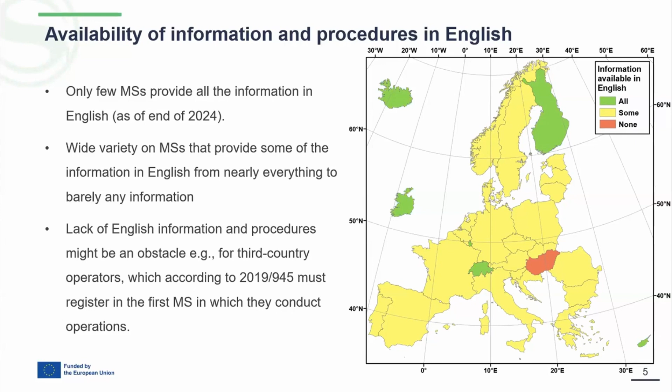And also migrant workers and third country operators might have issues if you need a local electronic ID to register to the website. And also EASA warns against fraudulent websites that offer non-official pilot licenses for a price. So I don't think it would be very surprising that people, when they cannot get the training materials openly available in the country they try to operate in, might look for additional websites and find some of these fraudulent websites.

So then the new rules set some rules regarding mandatory reporting of some incidents and occurrences. And roughly 2/3 of the member states provide information on the mandatory incident and occurrence reporting. But of these member states that provide the information, only roughly half give specific guidelines for UAS on which type of incidents or occurrences must be reported.

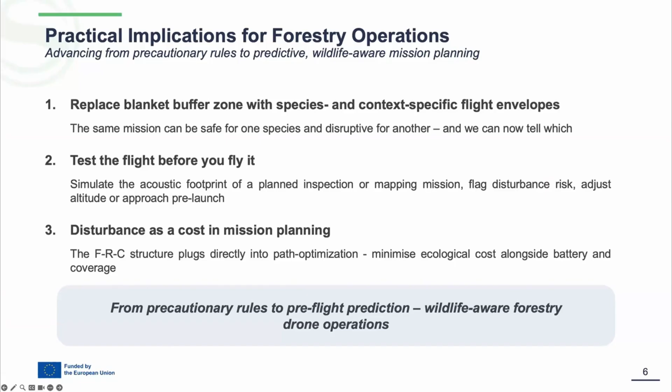So far, we have focused on environmental impacts. Now I will briefly move to the social dimension of drone technology adoption. The key question here is simple: who is actually using this technology? Because technology does not affect everyone equally, it often reflects existing inequalities.

To study this, we use multiple data sources. This includes surveys and project participation records, as well as interviews with experts and local communities. This helps us to understand the real challenges people face in practice. We also compare the results across different countries, including Spain, Norway, and Greece. So this allows us to identify patterns from different perspectives.

And the results show clear differences between sectors. In agriculture, there is a moderate gender balance. Women are often in leadership or advisory roles, while men dominate technical drone operations. In forestry, especially in Norway, the gender balance is low. Men dominate both operational and technical roles. In livestock, the imbalance is even stronger, with very low participation of women.

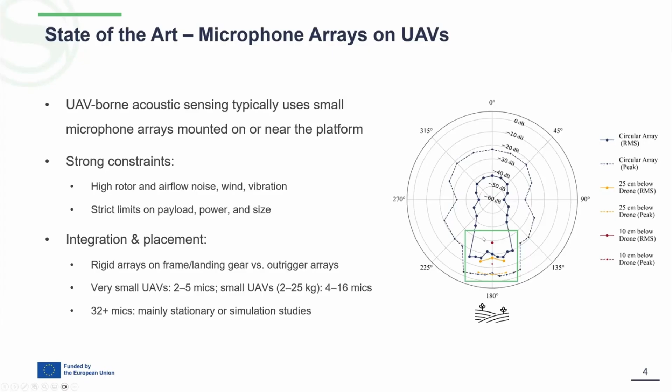And it also depends on the distance. The blue line is about 1 meter away, whereas the red dot here is, for example, 10 centimeters below the drone. So this was also our approach: we want to develop a framework which can be mounted directly on the drone so that we can use the drone itself as a kind of windshield.

And as I already mentioned, the noise introduced by the operation of the drone, no matter if it's the wind noise or the motor noises itself, are quite a challenge. So there are different ways how to deal with this kind of noise. On the one hand, there are the classical post-processing approaches, like, for example, spectral filtering or source separation. But lately, there are also developments regarding AI-based approaches, like data-driven denoising or even localization models.

The big benefit, of course, is that it shows potential for improved performance, but at the end, it's always this compromise between a robust and efficient versus a promising and expensive approach. So there are some key research gaps, especially for agriculture. Namely, most of the work we see in acoustic sensing is done so far for speech or gunshot sounds. So usually very loud and very distinct noises, but not for broadband agricultural sound scenarios where you have to cover from animals to heavy machines.

So that means we have a lack of domain-specific data sets, as I mentioned, livestock, insects, machinery, and this also leads to little evaluation under realistic ego noise of the drone itself and also low signal-to-noise ratio conditions, especially if you're talking about very silent noises like an insect, for example.

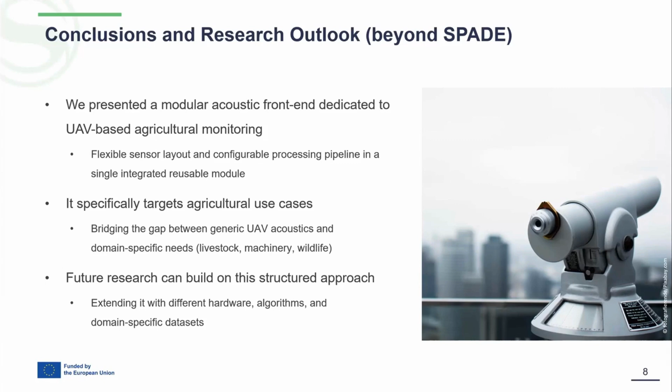But of course, there will be future research needed to even improve this approach. For example, extending to even more hardware configurations and maybe even more powerful approaches, which will need higher computational power, which we decided not to focus on, because, as I said, we really wanted to process everything on the drone itself, so that there is no transmission of the raw signals needed.

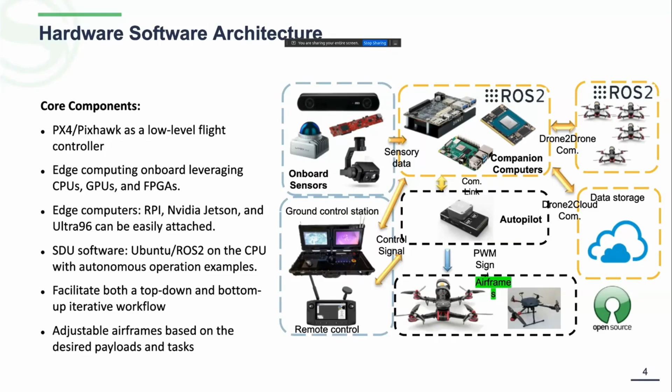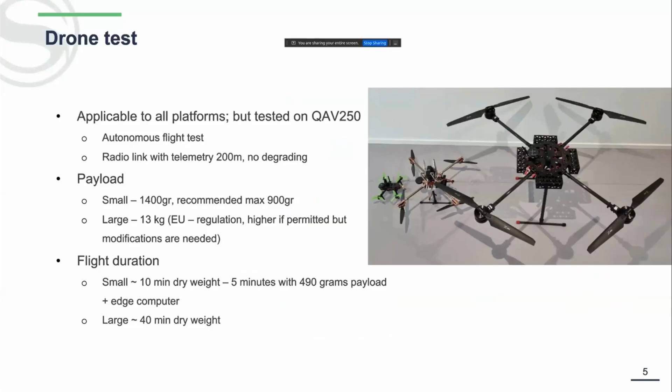Sometimes you need to carry a small light camera, other times you need to carry a heavy planer that I'll also be showing you. So we created a wide range of drones, and we are mostly using off-the-shelf components. We realized that the larger the drone you make, the more often you need to build the drone around the tool and not build the tool around the drone or build the sensor onto the drone itself. So I'll also be going slightly into detail with that.

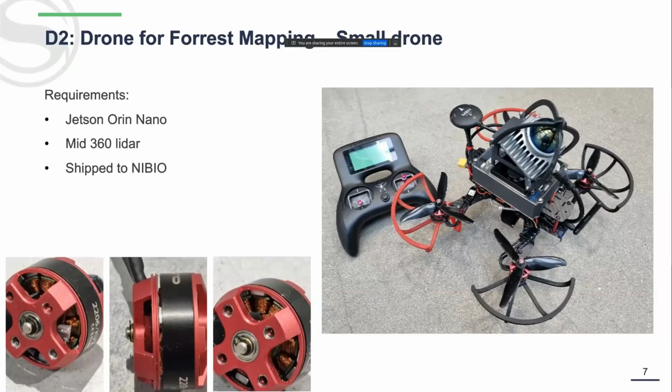First off, this is a very iterative process, so we did learn a lot through this process, and some of the components we chose actually broke under shipment. So we had drones shipped to different partners that were returned because they simply couldn't take off, and they were able to take off right when we shipped them. So it's a very iterative process, and we went through these problems with the partners themselves.

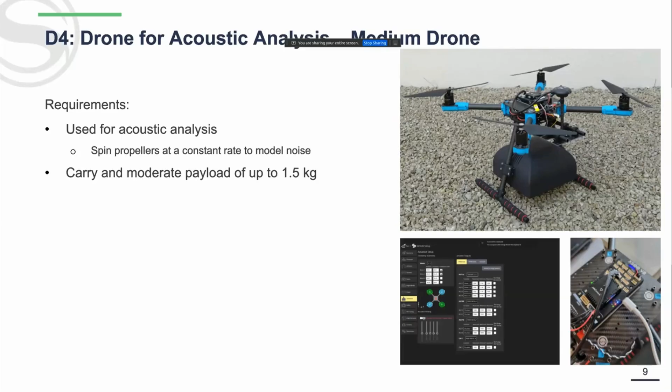Then for the acoustic sensor, again, this is a slightly bigger drone that could carry this acoustic sensor from Fraunhofer. And this is also the specific drone that they used for the acoustic fingerprint or processing, or the acoustic analysis of this drone.

We also participated in ShiftAPPens as a challenge provider, which, for those who don't know, is a student challenge in Coimbra, Portugal, where students could actually compete and learn a lot about the SPADE, learn a lot about how drones can be used in different environments, how drones can be used in forestry, open field projects, and livestock trials.

And we wanted these students to learn and actually teach them, how do you develop for drones? What are some of the thought processes you need to understand and start wrapping your head around. So we gave them the task to fly autonomously in an unknown environment, where they should then map the volume. And this was, of course, inspired by the open call below canopy flying.

We got the two winners of the teams, and they were very happy. And one of the teams came all the way from Turkey. So it's a very nice thing to be able to inspire these young students to work with drones themselves.

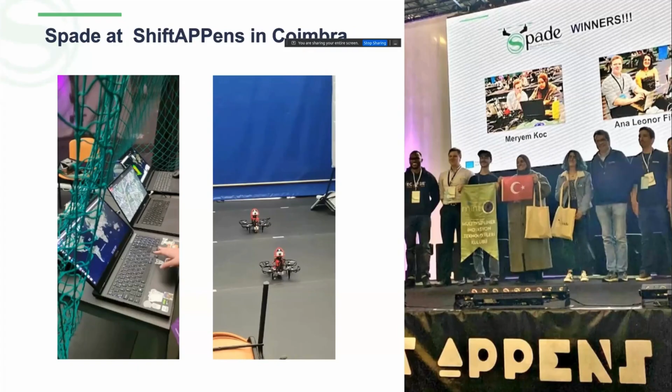Of course, we make an iterative process, and a part of SPADE is to have these drones being flown in swarms. So I rebuilt the ShiftAPPens drone and made some small updates based on the feedback and what I learned in that challenge. So now I updated some of the components and made it easier to scale and manufacture multiple of these drones.

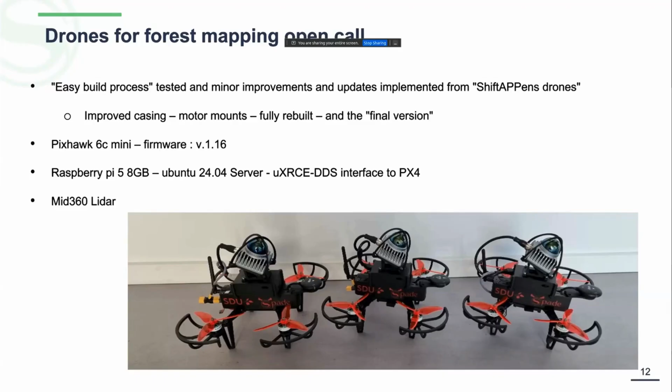And we shipped those off to the forest mapping open call. Stefan took them with him to Norway, and then he shipped them off. And the same goes for the camera drone. This is now in Mallorca with Pierre, who you will also be hearing a talk from later.

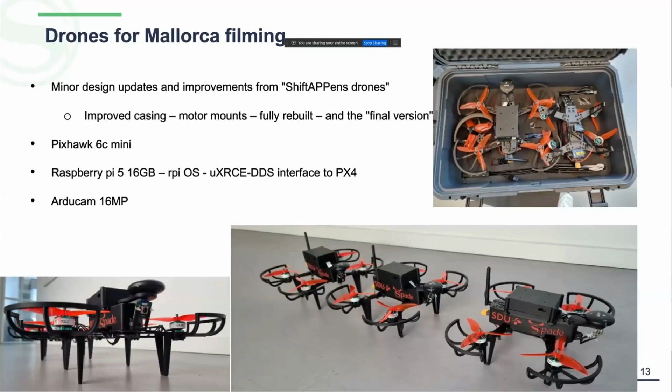So now, in the beginning, I also mentioned that we wanted to do tree planting. So this was the point where I joined SPADE, and some of my earlier colleagues made an attempt to actually make a drone that could carry this planter that is being developed by NIBIO in Norway. It was based on a Tarot X4 frame, and it was marginally able to accomplish the task, but it wasn't to a satisfying rate.

So we did a lot of upgrades. I fully restructured the entire frame and the sensor. The center mounted plates were manufactured in Norway as well. And that allowed us to actually build a drone that could plant trees. And this is the first drone-planted seedling, to our knowledge.

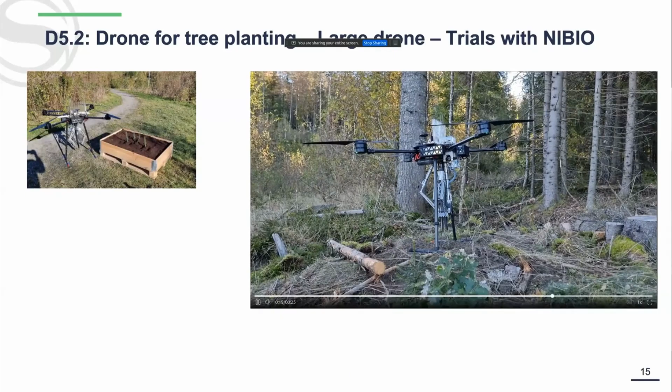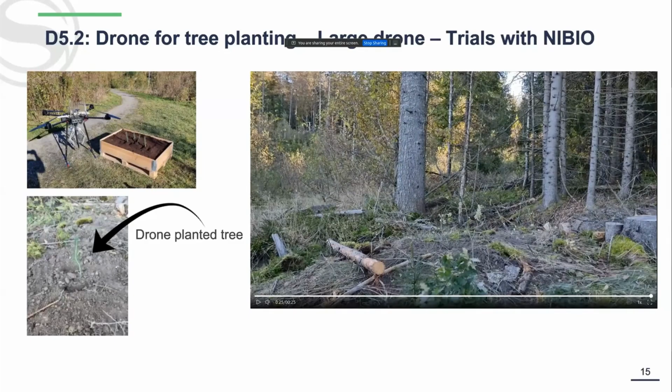And you can see how easily the drone lands and takes off, but there are also some obvious flaws in this design, specifically the landing legs and the weight of the system. So we were constrained to how strong we could make the planter. So this all accumulated into an IEEE Transactions on Mechatronics article. Feel free to read it. I highly recommend it. It's a great work from colleague Stefan from NIBIO.

Then we have the Sky Planter 2. As I said, we were restricted by the weight a lot. So I reduced the center mounting plates to almost half the weight. And that alone saved us 3 kilos of structural weight in the drone structure itself. And it's a lot stronger now, with legs that are also in an open call for self-leveling legs.

We had some specific requirements for the motors themselves, and these specific requirements have been accomplished by using a small CMOD S7 FPGA, and I can say that the task is a true minimal delay FPGA PWM mode conversion implemented on the drone. So very low power, very low latency.

We also developed a ground control station, and the files for this and the build process should also be coming online soon. It's a desktop setup that you basically carry in a suitcase, and then you can use this setup to configure your drones in the field. And we use it specifically for testing because this is a lot easier than doing the testing indoors in some scenarios.

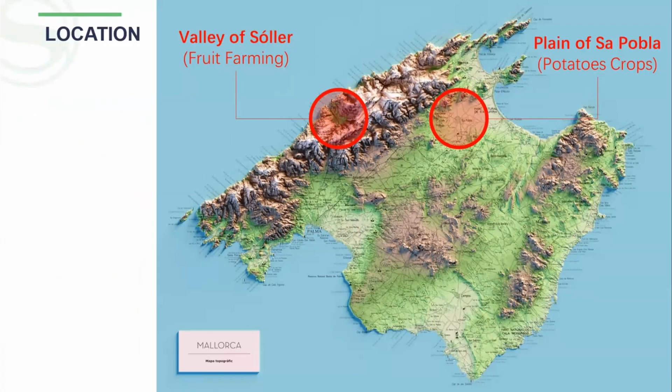So I'm Pierrick Leguillou from Any Solution, and I am the coordinator of the open field agriculture pilot of the SPADE project. Just to give you a bit of context, the pilot is undertaken on the island of Majorca, and we have two different use cases. As you can see on this map, it's on two very different terrain configurations. One is in the mountain region of Majorca on traditional terrace crops, where you can mostly find fruit trees, mostly olive trees and citrus trees like oranges and lemons.

The second use case is on potato crops. So here you have the traditional monoculture crops on a fairly flat terrain. So these two use cases are very different, and it was very interesting to see the differences when you apply drone technology in these types of crops.

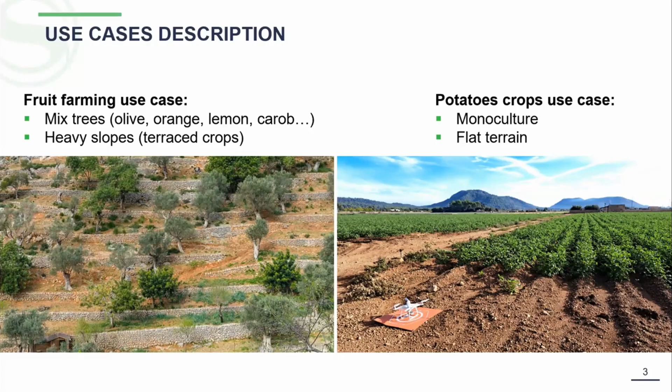So in this pilot, what we wanted to do was first to see how this drone technology could support traditional farming, especially in the monitoring and management of their cultures. And we had in mind mostly three different types of application. One was the detection of plagues and disease. The second one was health monitoring of the different crops. And the last one was spraying application. Spoiler alert, the spraying application was not as successful as expected, but I will come back to that later.

As a secondary objective for this pilot, we wanted to raise awareness about the technology to farmers and to the sector, because in the Balearic Islands, and I think in most European regions, the application of drones in agriculture is still very seldom. And in the concrete case of the Balearic Islands, when we started the project nearly 3 years ago, absolutely no one was using drones in agriculture.

So at the same time, in order to facilitate the work for the farmers and the uptake of the technology, we have done some tests and research on the cost efficiency of the technologies and to assess the needs and barriers of the farmers.

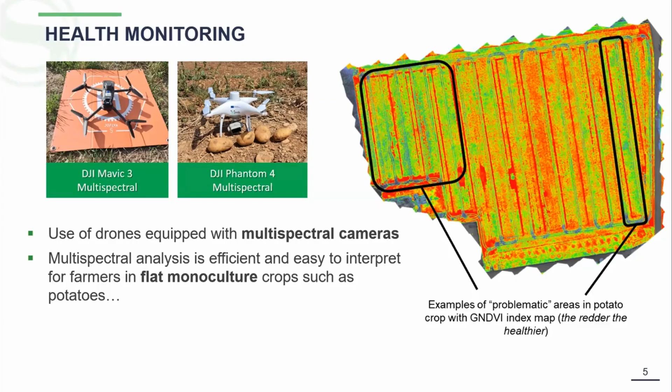So what we've seen is that in flat monoculture crops like potato crops, it's quite easy for farmers or for an agronomist to generate the maps, but also to understand and interpret the map, which is very important. On the contrary, when you look at terrain like mountain regions, which have very pronounced slopes, it's quite hard to interpret, especially with fruits, because the growth is very different.

In this specific example, you can see that you have a lot of mixed trees. It's not monoculture, so you have mixed trees, and it makes it quite difficult for the farmers to interpret. So we've seen that in such use cases, farmers need to have technical support or support from someone who could analyze and who could help them to interpret the results.

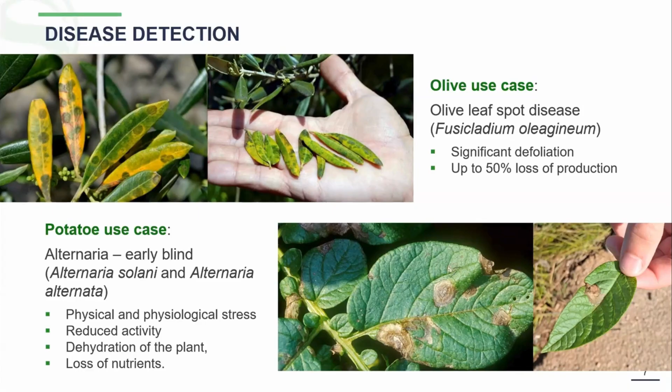The second objective of the pilot, as mentioned, was to work on disease detection. And in this case, we focused on two specific diseases. One is the olive leaf spot disease, and the second one is a fungus called Alternaria on the potato use case. For both use cases, these diseases are very relevant for the Balearic Islands because they represent up to 50% loss of production in those crops. So it was very important for them to be able to better identify this disease.

How have we done that? So we've been gathering data. We've been performing some flight missions. We're working with the two local partners that we have in the project, which were the agricultural cooperative of Sóller and another farmers cooperative called Mallorcan New Potatoes. And so with them, we've done these flight missions where we've put ground markers indicating exactly where infected trees or plants were and where the healthy ones were.

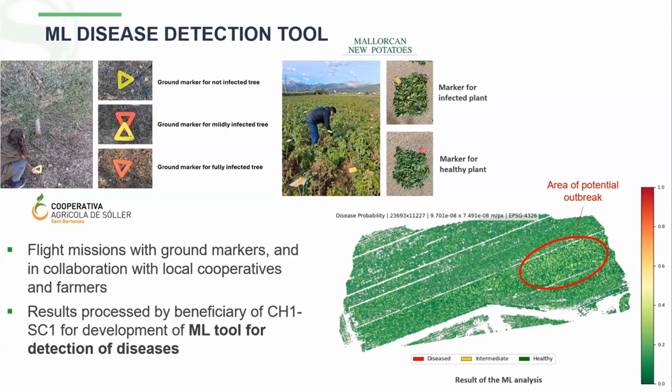These data have been provided to one of the beneficiaries of the open call that we had in the SPADE project. And I will not talk a lot about that because I know that later on there will be another session from our colleagues from STAM, the winners of the open call, that will present the results of their tool. But as you can see on the map on the bottom right of the screen, what you obtain is a tool that gives you a map with some percentage of estimation of potential outbreak. So this helps farmers to identify where they can have some infection of their crops.

Another work that we've done through the pilot was also a test, because a lot of farmers were telling us, okay, so if I have a multispectral drone, how do I fly it, at which altitude and so on. And here comes a conflict, not a conflict, but what do you want to achieve? Something that is cost efficient or something that is very high precision. So here you have to make a compromise between time versus resolution. And this is defined mostly by at which height you are going to perform your flight mission.

So we've done several tests. And of course, the lower you fly, the higher the resolution, but the more time consuming. What we also saw is that due to some limitations, you cannot do automatic mission flights under 30 meters. That should be manual, depending on the drone, of course, and on the software. But drones cannot maintain a constant altitude under 30 meters. So what we found was the best option in most cases is 30 meters. That was helpful for the farmers to know.

And the last part that's also quite relevant for us in this pilot was the capacity building and raising of awareness of the local stakeholders on drone technologies. And this was a bit challenging because we have a problem, but I think it's not only in our region, but in most of Europe. It's the aging population of farmers with the obvious lack of knowledge regarding digital skills and use of technology.

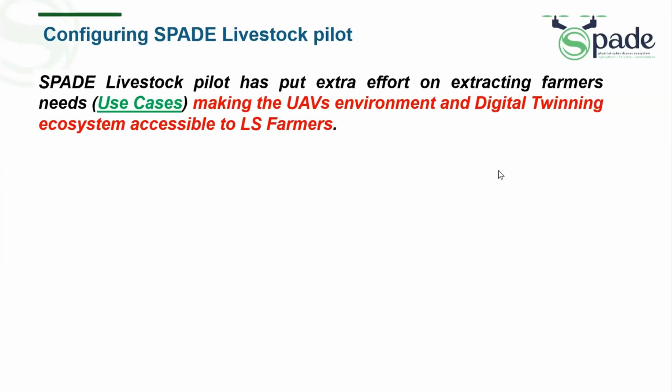To extract farmers' needs, we organized an environment that took advice directly from the horse's mouth, if I may say so. We organized an advisory board, supervised by SPADE itself, by Professor Bochtis and his team at the University of Thessaloniki. We acted as the technology integrators, myself and my team from NST, and members from the other SPADE partners in the task, CERTH and Fraunhofer, were very valuable in providing the AI-enhanced modules.

When we started structuring the use cases, the aspects addressed were discussed with the end user experts and professionals, and we thought it would be important to have a rapid prototype very early in the project, tracking a first rudimentary use case, so we could have a baseline and build on that, making the use case more sophisticated and more intelligent as we go. So we structured 5 use cases, and we managed to evaluate 3 of them until now. We hope to evaluate at least 1 more in the project lifecycle.

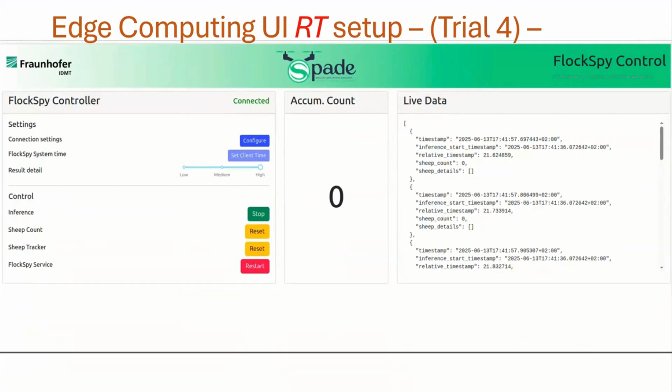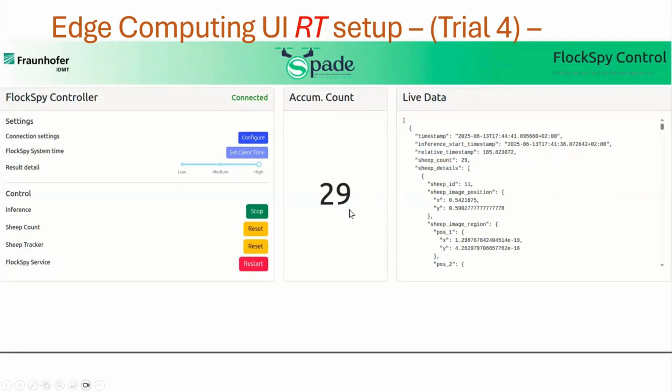output from the FlockSpy. You see the numbers coming out from the counting of sheep, and then you can also check there that the application on board bound the box around the animals that were spotted. So this is the opportunity for the tracking of the animal itself further on. Right, so this is the approach.

Offline, after the flight, we were able to run the footage and see the bounding boxes on the footage that was maintained by the SDU drone provider. Now, takes from this trial allowed us to organize the second set of use cases, which was actually a trade-off between airborne edge computing and in-situ edge computing, which is again edge, but

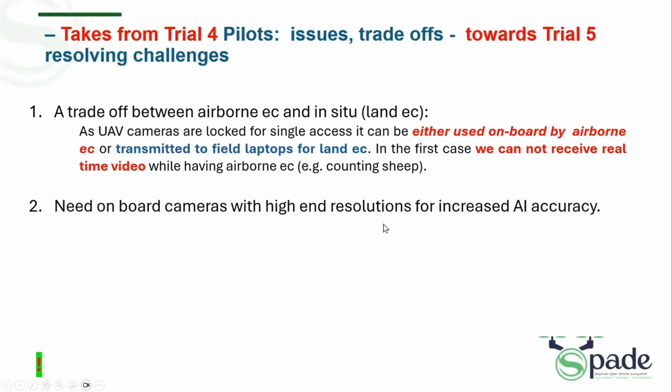it's not airborne. So what we were trying to do there is, instead of having the AI tool executing the solutions and AI analytics on the Jetson, to have a field laptop, a rather more powerful and also power-consuming device nearby in the field, where we could receive real-time video, and then, of course, cloudify the video to the SPADE livestock platform. Of course, we were also able to access higher resolution cameras, since the UAV used was a commercial one. It was actually the Parrot Anafi one.

And due to the above, we opted to proceed with land edge computing, which enables real-time streaming of UAV cameras to the cloud. So that's the approach that we took, aligning now to the requirements coming from the advisory board. One of the requirements, one key issue, was to provide the piloting of the UAV service to be acceptable, adoptable, and accessible to the farmer itself and the farmer consultant.

So we had to devise a user interface with a plug-and-play solution to lift the UAV from the land, from the field, and then to move it in a stepwise manner safely towards the flock. Navigating using small customizable steps, approaching the flock inconspicuously so that the animals do not get frightened. And finally, one of the issues was to store all the flight mission footage and data to a cloudified environment.

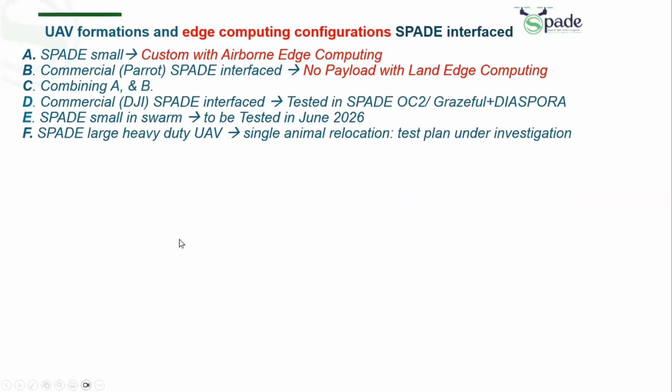Finally, this is the final slide, just mentioning it to relieve everyone from livestock piloting. We have managed to evaluate 6 different formations: a small custom UAV, a commercial UAV, combined version of commercial and custom UAVs, and of course third-party commercial UAVs that were not totally part of the interface, like DJI. DJI is the brand that is being used by our subcontractor, by SPADE open call contractors, sub-projects.

Swarming is the next big thing that we are doing, and we are testing that in June, where we will have small SPADE drones acting as watchdogs, fencing around and watching trespassing events for the flock addressed.

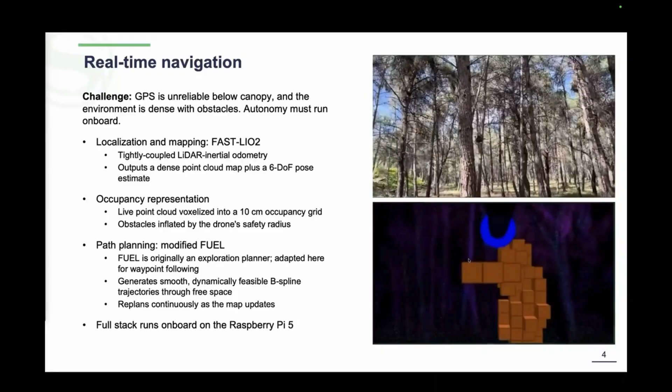The output of this is a dense point cloud plus 6 DOF pose estimates at a fairly high rate. We feed this point cloud into an occupancy grid representation. So we basically voxelize it to a 10 centimeter resolution occupancy grid. And those are the orange boxes you see in the video that's playing on the right now. So that is where the obstacles are, and then we inflate that by the safety radius of the drone as it flies through the forest.

Finally, we use a modified FUEL algorithm. So FUEL is an exploratory path planner. It's adapted here just to follow waypoints, but basically it generates smooth, dynamically feasible B-spline trajectories through free space, and it continuously replans as the map updates. And I had some videos here of the drone flying through the forest. Stopped, but you can kind of see the drone's view with the mapping of the forest and these collision boxes that it's avoiding, and that was all autonomous basically, so single drone autonomy, and the full stack runs on the Raspberry Pi 5.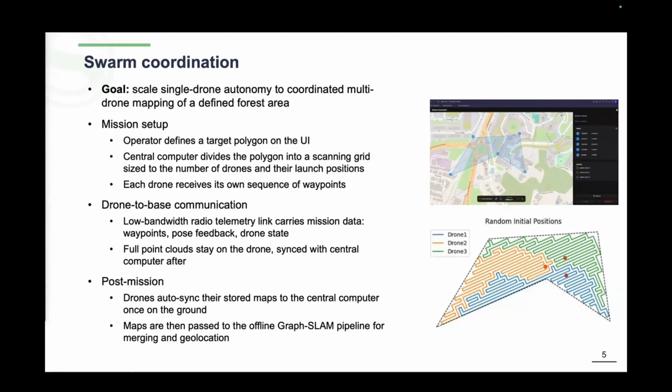And then a central computer would divide up that polygon into a scanning grid depending on the number of drones and their launch positions. And you can see that down here in the lower right corner. And then each drone just basically receives a sequence of waypoints to follow, and it does its best to follow those waypoints while avoiding collisions with the environment.

The drones communicate back to a centralized computer during this test with a telemetry link. So this is a low bandwidth radio telemetry link that carries critical mission data like the waypoints it needs to follow, pose feedback, and drone health. Heavier data like the actual LiDAR point clouds need to stay on the drones because we can't really use Wi-Fi over the distances that we need to in these tests.

So basically, after the mission, the drones auto-connect on Wi-Fi to the central computer, sync their data, and then the maps are passed to the offline Graph-SLAM pipeline for a final merging and geolocation.

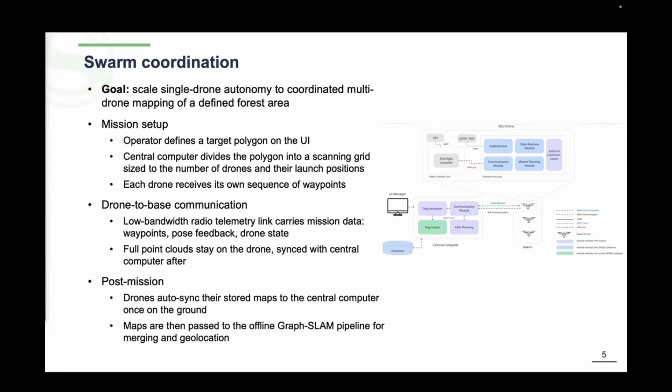Here you can see a little video that we took. This is some tests with 3 drones swarm mapping a Norwegian forest. This was manually piloted because we don't have the swarm autonomous coordination just yet finished, but this was just to validate that the post-test stitching was working properly and that we were able to do this coordination. And you can see that here.

So on the right, you have a stitched map from those tests where I've color-coded the point cloud based on the drone that actually took the data in question. And you can see it comes together quite nicely.

So how that works, as mentioned, the real-time LIO map is quite good, actually, but it does drift over time. So basically, it's only ever taking relative measurements based on the previous frame. And it doesn't have any absolute measurements of where it is. It has no georeference. It has no GNSS input. So it can tend to drift over time. Maybe if you go 100 meters, it might get about a meter of error or like half a meter of error, which is not significant.

But when you're looking at mapping a forest, you suddenly start getting duplicate trees and stuff like that if you go back to an area you've been to before. So we need to correct that. So we have an offline pipeline that uses GraphSLAM refinement. So basically, we're using GTSAM, which is an open source GraphSLAM repository. And it will warp the LiDAR inertial trajectory to match GNSS fixes when we get them. So if we get GNSS data, it will try to match that information.

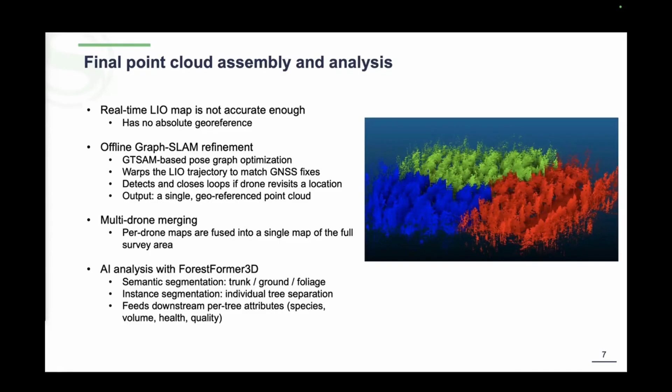Multi-drone merging works kind of in the same way. Basically, if one drone sees a part of the map that another drone has already mapped, it's able to try to figure out where in that previous map it is, and then add those same loop closure constraints, which allows the disparate maps to be stitched together seamlessly.

And then the final step is to use AI segmentation.

So these videos are not playing properly. Sorry about that. Not sure why.

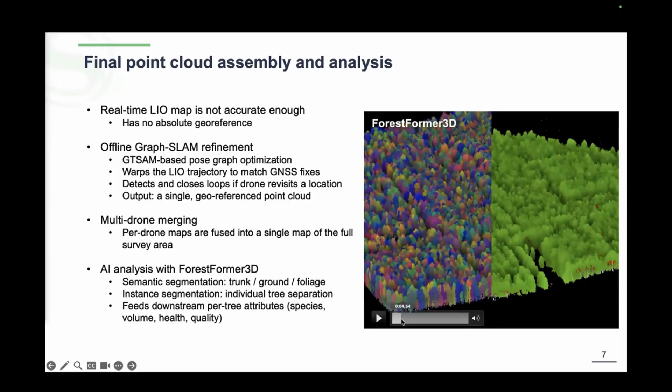But basically, we have this AI algorithm that we've already developed on above canopy data that basically takes these point clouds and segments them into foliage, trunk, branches, and ground. And this is a very powerful tool for doing analysis of these point clouds afterwards. You can also do instance segmentation, where we're looking at figuring out what points belong to which individual trees. And you can imagine this is quite difficult once the trees start to overlap over each other.

But these algorithms perform quite nicely, but we don't have big below canopy data sets that we can really train them on. So we're looking at addressing that within this open call as well, within this task. And that will feed downstream per tree attributes like species, wood volume, health, etc.

So for this task, at this point, we've got the GraphSlam pipeline, we've got the single drone autonomy, and we're just looking at wrapping up the swarm coordination and the final AI development, and then we'll be doing final integration testing over this summer.

Right, so that was the first bit. I'll just move straight on to the second topic, if that's okay with everybody.

So the second thing I want to talk about today is our work on Sky Planter, aerial reforestation with an ultralight seedling planting drone. So the motivation here is that tree planting is a very labor-intensive and costly process with a lot of potential for automation.

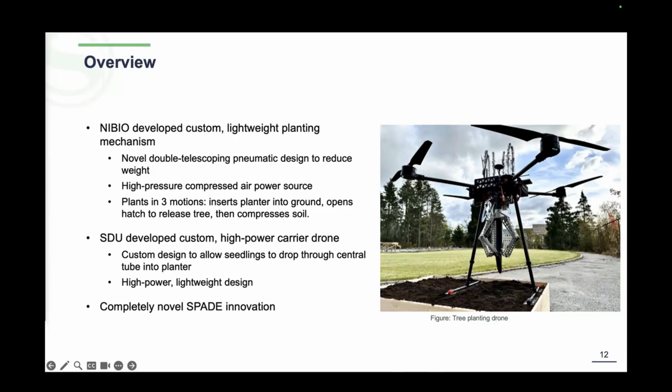So the planting mechanism works according to the image you see on the right. Basically, we have 3 concentric tubes that slide on each other in a double telescoping design on plastic sleeve bearings. So we've got an inner tube, which is rigidly attached to the drone. We have an outer tube on top of that, which carries the dibber, which is this triangular portion at the bottom of the mechanism, and a hatch. So this hatch can open up and release a tree.

Then on the outside of the outer tube, we have a compression assembly. So that slides up and down on the outer tube. And that's this pincer mechanism here on the outside. The role of that mechanism is to compress the soil around the tree. This is really important because without that compression, the tree will often die because it doesn't establish a good contact with the soil, and it can also topple over due to frost heave.

Planting happens in 4 steps. So the drone will land on the target site. And then this planting dibber on the outer tube is explosively shot into the ground to create a hole in the ground, burying the hatch. Then the hatch is opened up to the side and releases a tree. And then finally, that whole hatch and dibber assembly is pulled up while the compression mechanism is pushed down, and that pushes the soil downwards and inwards around the tree, completing the plant.

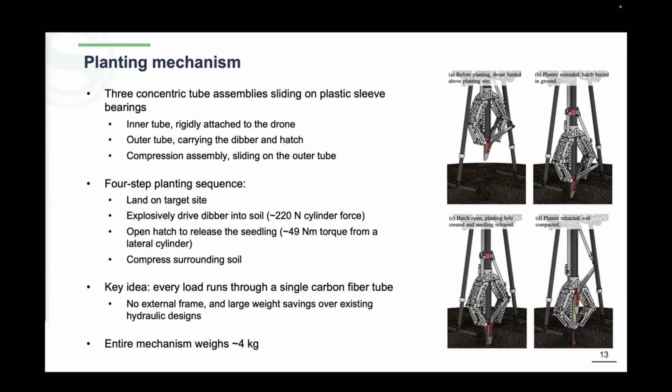The key idea here is that all the loads from this planting run through that single carbon fiber tube, which makes sure that the loads are aligned with the center of gravity of the drone, but also significantly reduces weight. So carbon fiber tubes are very light, and we're talking about reducing weight from some of the existing mechanisms that might produce similar motions but have large steel hydraulics and external frames, going from what current mechanisms might have, which is like 600 kilos, 700 kilos upwards to a ton, down to about 4 kilograms for our mechanism, which obviously is quite important if we're going to put it on a drone.

The planting mechanism uses pneumatic air as a power source. So we chose to pursue pneumatics for this design because we needed explosive, very high power motions. And getting explosive motion from electrical power, you either need to have heavy actuators or some kind of energy storage with springs, and both of these end up being very heavy.

Meanwhile, compressed air is actually very high power, short duration actions with quite little mass. So even though the energy density of the storage might not be quite as efficient as, say, a LiPo battery, all the downstream elements become much lighter. And so the overall system becomes much lighter as well.

We're also using a very high pressure storage tank. So we're actually using a carbon fiber paintball tank at 300 bar pressure, which is very high pressure. And then we do 2-stage regulation from 300 bar down to 7 bar. And because that compression ratio is so high, we actually get a lot of power out of this single 1.1 liter tank, enough power to plant 78 trees.

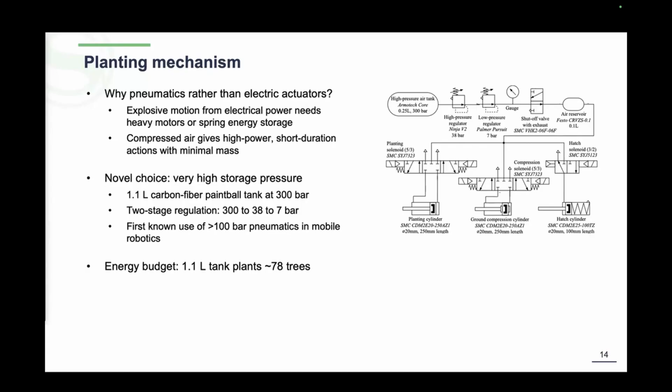And this is also, to our knowledge, one of the first uses of very high pressure compressed air in mobile robotics, and we think that that's an interesting application going into the future.

The carrier drone is a custom quadrotor X configuration drone, 1.32 meter motor-to-motor diagonal distance. As I mentioned, the planting tube runs straight through the drone's center of mass, which is important to let the trees fall through, but also to align the reaction forces of the planting mechanism with the center of gravity of the drone, maximizing the planting force, but also preventing the drone from tipping.

The body is made with carbon fiber sandwich plates, reloading mechanism on the top, and planting mechanism on the bottom. I won't go into the details of the drone itself because Thor already did that, but it's a pretty powerful, nice drone that Thor built, so kudos to him for that.

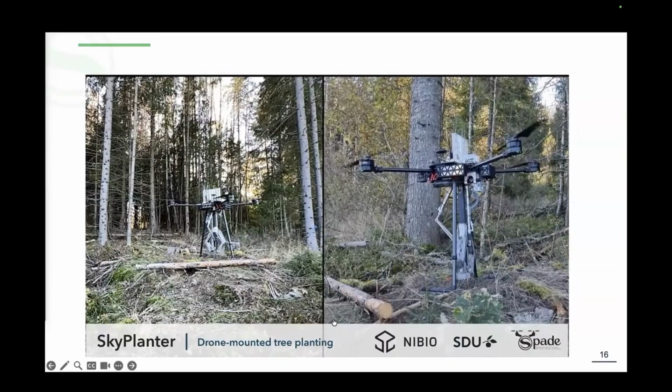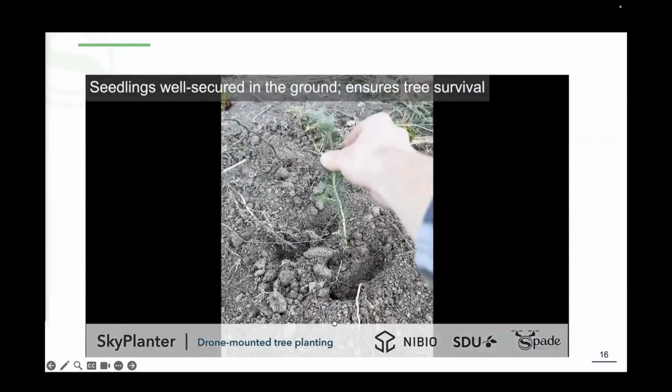Here I'll show you a video of the actual drone landing and planting. So you can see here it's going to do that planting sequence I described earlier. The shovel goes into the soil, opens a hatch, releases the tree, and then the compression mechanism descends a couple times to compress the soil around the tree. The seedlings themselves are quite well secured in the soil. The drone can plant multiple times in quick succession and reload.

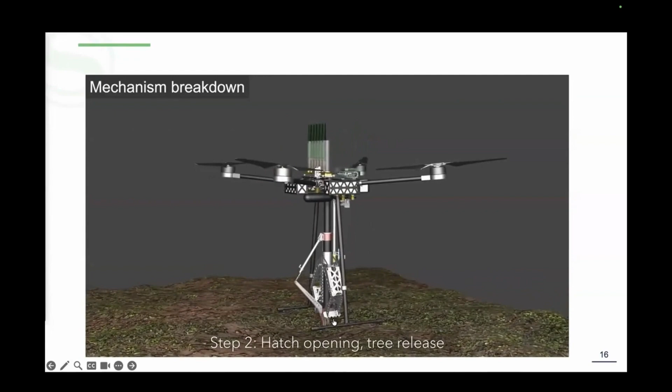And this animation will show you some of the components of the design a little more clearly. So you can see here the planting motion again. Dibber goes into the soil, opens the hatch, goes back up, and then the compression mechanism compresses the soil around the tree. We'll show that one more time with the section cut, which shows it a little more clearly.

The reloading mechanism basically just shifts the trees to the side, and then the tree drops into the central tube, and then it's planted in the exact same manner as before.

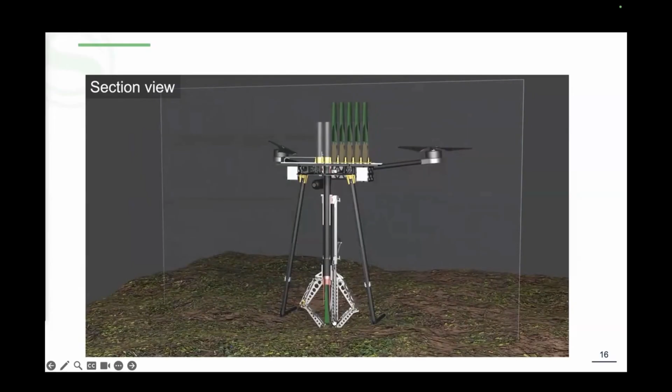Sky Planter is an ongoing piece of work. So we do have some ongoing challenges we're trying to explore. That's a bit loud, so let me reduce that. The main challenges are that the first design was not quite strong enough, so it was really only suitable for planting in soft soil types. And then the drone also could only land on nearly flat surfaces. So we're trying to address both those issues.

Sky Planter 2.0 looks at doubling the planting and compression force to work on harder soil types. And we're also exploring reverse thrust to push the drone into the ground and then decouple planting force from vehicle weight, which is understandably quite important for aerial applications.

And then we also have a self-leveling landing gear project that's ongoing as a SPADE open call, and it's actually going to be presented by Alexis a little later today, so stay tuned for that. But that's looking at using active braking to have self-leveling landing gear, which will allow this drone to land on uneven terrain, which is much more appropriate for an arbitrary forest. You don't usually have flat terrain in forestry. So that's a really exciting piece of research, and I encourage you to stay tuned for that presentation later today.

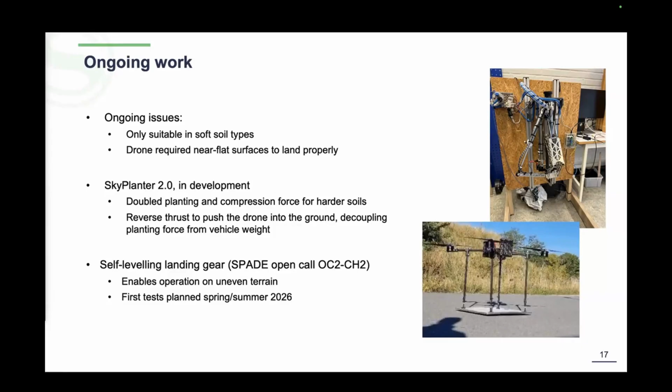I'm Efstathios Stavrakis. I'm one of the directors of Algolysis and a researcher in the team. We are an SME. We do applied AI and software engineering. Basically, I made this map because some people may not know exactly where Cyprus is. We are on the far southeast end of Europe. We're on the Greek part, which is a member of the EU. And we were founded in 2014.

We do a lot of data-driven solutions, and we have many active funded R&D projects. So our focus areas are mainly distributed systems and applications, where we work on even basic research. There is also work happening in computer vision and graphics. And we do a lot of data engineering and analytics, and we have branched out into IoT systems and machine learning.

So I'm going to show you a few examples of our previous work very quickly. My presentation is very visual, so I think it's not going to be very tiring. And then I'm going to move on to Graceful to present you some of the work that we have done under the SPADE Open Call 2 project that we were awarded.

So some of the stuff in the past, we've done simulations. So here there is a simulation in VR, and it's integrated with data communication in the cloud, with sensors. And then we also had another project where we did industrial object detection and recognition. There is a company, a manufacturer of toys in Cyprus, and we work with them under another European Union project, the SOP4CF Horizon project. And we built a very capable object detection and recognition model, and we presented that too.

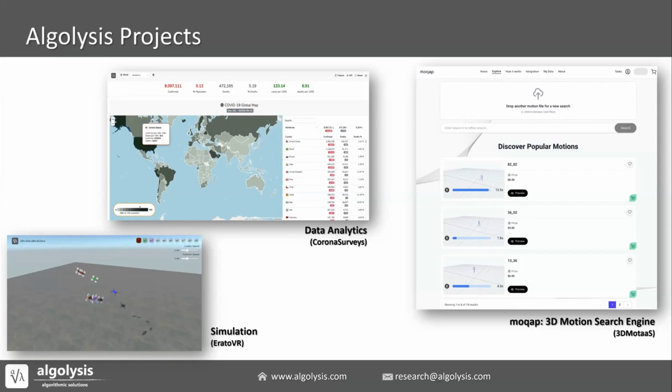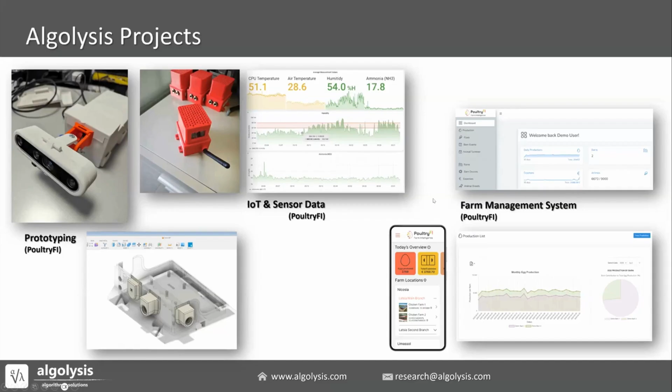Now, other things we've done in that context: we've done some smart retrofitting of an egg grading machine. This is a dated grading machine where everything is manual. So we created a Raspberry Pi setup. We trained a model that can run very efficiently on the edge and can grade eggs very accurately. And we deployed that in the farm. This is a real farm. This is a business. It's not lab work. So we have a lot of experience.

This is also the poultry farm where we have our sensors. We have wired 2 farms, and this is an ongoing effort. It's been for a couple of years now, and we collect a lot of data from there. And we observe not only visually, but audio and also environmental metrics. So we have a lot of experience with field deployments, where we are not just working in the lab.

And then we started working in parallel in our project to build our distributed shared memory technology. This is a layer of algorithmic work for novel algorithms for distributed shared memory. Basically, it's a set of nodes where each node provides a space in memory, and this also has a communication medium on top of that, where the nodes can communicate wirelessly between themselves and exchange information. This is very powerful in the context of drones, and we started prototyping devices and testing flights and intercommunication between drones. This is still ongoing work. It's been a few years, but we're getting there.

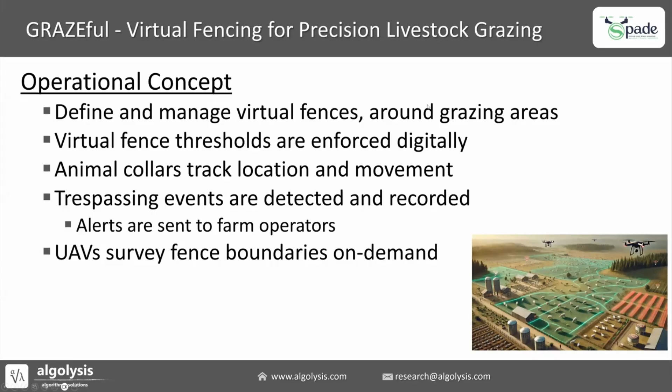And we also wanted to detect, monitor and record trespassing events and send some alerts and so on. Another capability is to allow UAVs to survey fence boundaries on demand. So once you have an alert, you can request that a drone is dispatched to go and get visuals from the area.

So what we've done is, the project basically integrates virtual fencing. It provides an interface for that. It integrates UAVs, the DJIs that we have, and also some wearable collars can be integrated. And we actually now have a field laptop that we are using in the field. It has some communication with the livestock platform, and this is ongoing work, of course. Although the project finished, we are still working on these items.

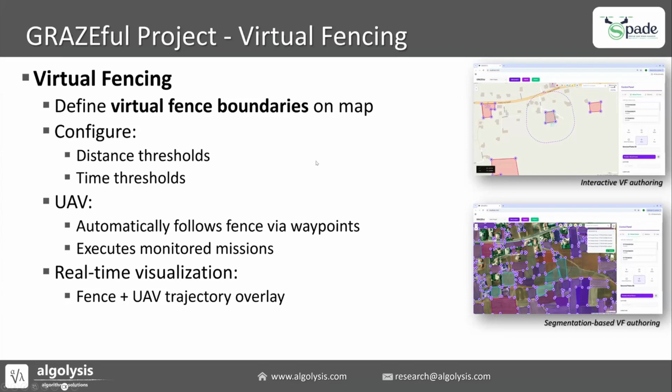So what we built is an application. It's a React application, a web-based application that runs on the laptop. It doesn't need a server or anything, so you can execute it locally on a field laptop. This is important because we did not assume that there is cloud connectivity, which complicates things because you don't have the processing power or the storage capabilities and so on. And this has worked pretty well, actually. It's a very lightweight application, and you can define fences manually and semi-automatically.

I'll show you a video instead of describing the features. So you have here your interface, and you can create virtual fences manually. This is a screencast. The user defines virtual fences and can do certain operations on them to modify them, and it's also possible to annotate them and to give some thresholds. The thresholds are useful for doing the trespassing detection. So if an animal goes out for more than 10 seconds, it will issue an alert and so on.

So this is one way to define fences, and we experimented with another way to semi-automatically generate fences, because sometimes it may be tedious. So we thought maybe we segment the image and then let the user manipulate and choose which ones he would like to use. So you can select what you want. It's a bit crowded there, of course, but you don't have to use all of them. You can just pick what you want and edit them. So this is the capability for virtual fencing. It's pretty straightforward, basically.

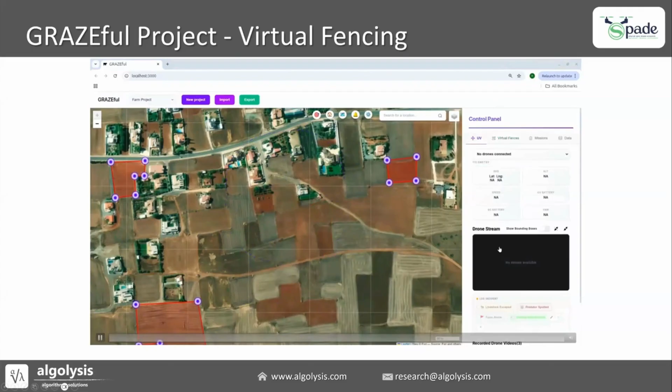We also integrated the DJI drones, so now you can stream a live feed directly from the drone into the field application. This means that you can timestamp it, tag it with events, store it and process it further. I'm going to show you a little bit of a video of what it looks like. These are pre-recorded videos, of course.

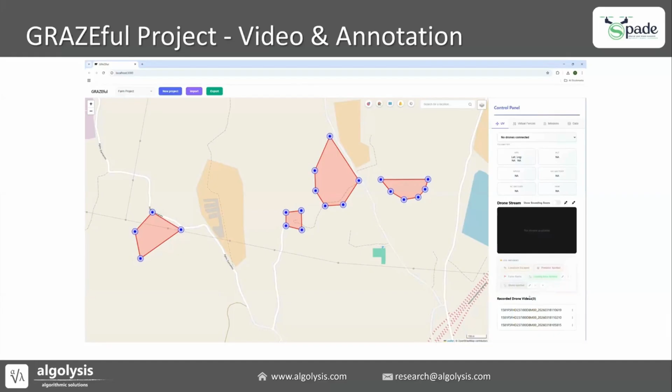What I'm showing here is that you can annotate them. You can create certain types of annotations. So for instance, you're working with sheep. You can say, I have an incident of an animal being spotted, I'm going to create an event. The reason is that you can capture the video in the field, and then offline, you can go to a debriefing room and say, okay, what's happening here? I'm going to annotate the data.

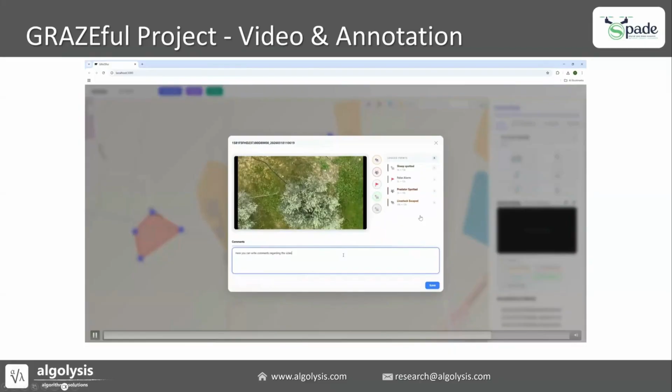This was a requirement because the SPADE project is looking for a way to collect data and then annotate them so as to be able to train models later on. This is what we understood. So this is quite useful. It's not real time. You can obviously annotate in real time, but it can be tedious because it's a live feed of video, so you may not have time. So you capture the video and then you do it offline, and you can play back and so on.

The other thing that we do is... Please conclude as soon as possible because we passed the timeline, if you can conclude this.

Okay, so we have trespassing events. You see a sheep here, it will move around. I have videos for everything, but I probably don't have time. When the tracked animal goes in and goes out, it will issue an alert. Maybe I'll just show you the alerts that are coming up.

There you go, you get it. And of course, this can be connected to other things. Now, another thing is there is mission planning. So the user can plan missions from the lab and then go and execute them. So you can select the waypoints that the drones will do. These are the waypoints that the drone will go on, the little numbers that are coming up. And you can automatically or semi-automatically have the virtual fence being traced. Okay.

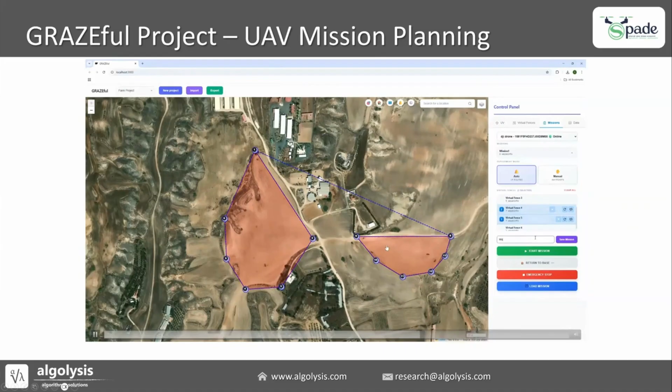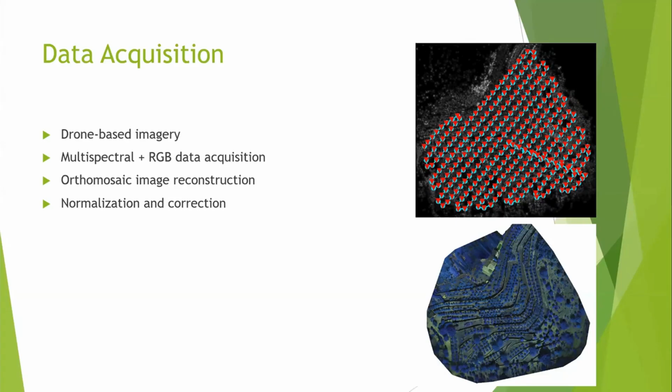So there are several approaches that we are following for tree detection, such as object detection, for example, using a YOLO detector with the RGB data. We can also use some prior knowledge of regions of interest encoded as a GeoPackage, or also use 3D data, so basically segmenting the digital elevation model and digital terrain model to segment trees.

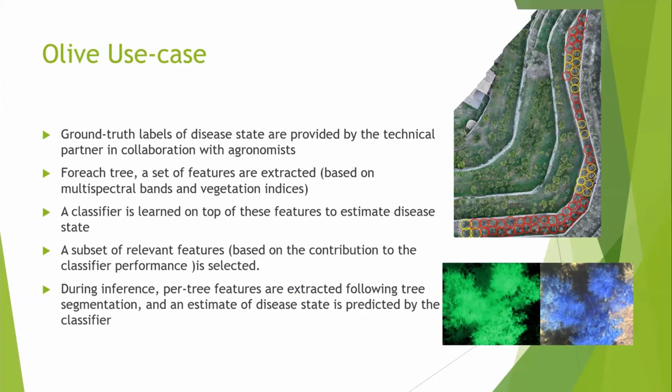As for the potato use case, which is intrinsically different because we don't have plant detection in this case, our aim is to identify Alternaria in potato crops, which presents itself as lesions on the leaves. And again, in this case, we have markers which deliver ground truth information on regions or plants or sets of plants which are either healthy or infected. These are the two levels that we are dealing with in this case.

Labels are applied as GeoPackage polygons, so we draw polygons manually. It's a sort of manual annotation derived from the markers provided by the SPADE partners. Then we extract features from patches, so we patchify, in a sense, the orthomosaic maps and extract features from patches. For example, we relied on 50 by 50 centimeter patches, and each patch is assigned a ground truth label based on the overlap with the polygon ground truth.

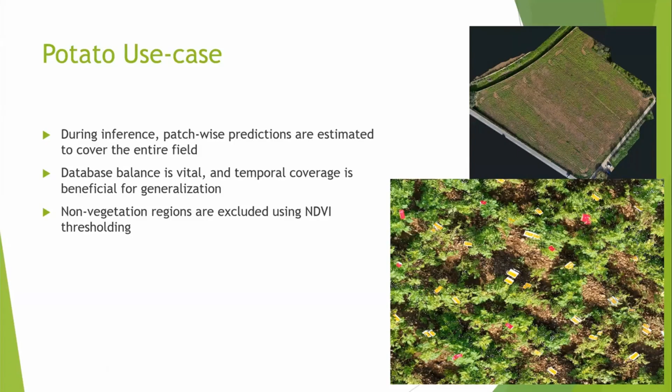So similarly to the previous approach, we perform feature extraction and then feature selection to obtain the subset of features which better explain the disease state. During inference, we run the patch-wise feature extraction, of course excluding the non-vegetation areas, and then we run the classifier on the extracted features. And of course, in this case, the dataset balance is essential. We try to subsample classes in order to maintain the balance in the training set.

As I said, this solution is implemented as a FastAPI web service, which is also accessible via a sample web application based on Gradio, and it allows for the uploading of orthomosaic maps of different bands. It performs the alignment in case the bands are not perfectly aligned. For example, this can be seen with RGB or with digital elevation models. And then it extracts features and provides the heat map or the prediction, a color-coded mask of the predicted outcome.

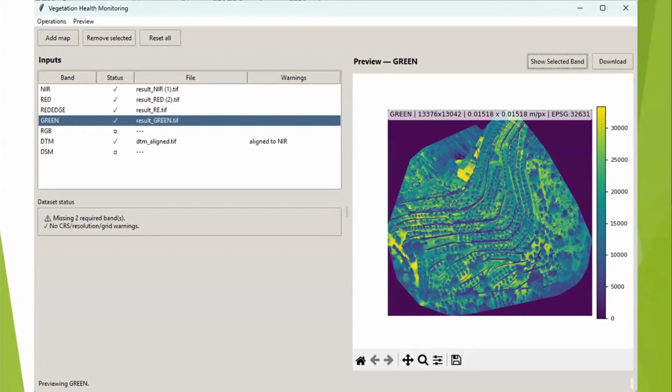There is also a supporting application, a Python application that runs on Windows and Linux, to interact with this library. These are some preliminary results of the olive use case and potato use case on selected fields. But we are still finalizing the final pieces of this library.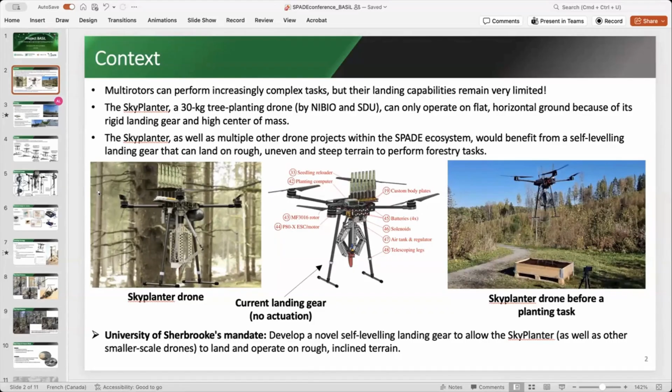In all of these platforms, we've been using brakes within the landing gear. The nice thing with the brakes is they can dissipate kinetic energy without transmitting high load onto the drone structure. It's kind of a passive mechanism, so it's backdrivable and reacts instantly. It's usually lighter than a motorized solution, mostly because you don't need to generate the power for braking and slowing down the drone. You only dissipate the power.

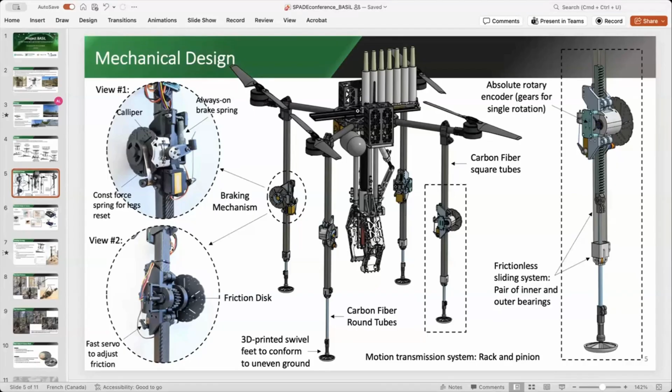We have a central electronics controller that coordinates all of the legs together, gets the information about the attitude of the drone and the desired state. Are we in the descent phase? Do we want the leg to lock? Do we want to adjust the attitude? And we communicate back to the drone different states about the working of the legs.

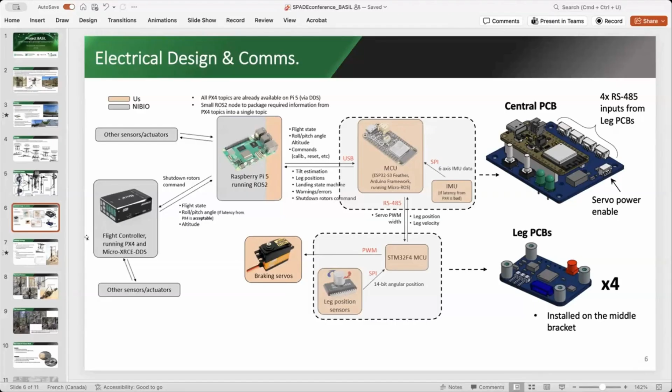Each leg has a small control circuit board that mostly does the high speed control loop to control the servo and read the position of the leg. So that's about it for the electronics. On the software side, we have a high-level control strategy that decides what to do with each leg. The commands are sent to each of the leg control modules, and the positions of the legs are then controlled.

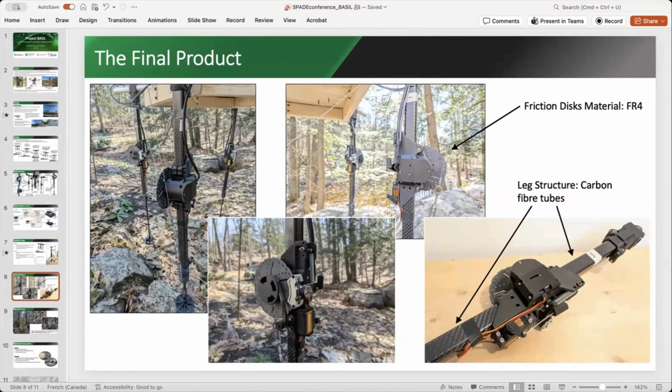So I have a video here of a single leg being lowered at a controlled speed. So that's really nice to see that we can do that accurately and brake precisely. We made a mock-up. We don't have access to the full drone as part of our project. We're now going to ship the leg to Stefan for integration. So we made a mock-up here. We see the four legs being built and being displayed in a natural environment.

We are in the final phase of integration right now to do the full control and test the KPIs. But we think we have a very nice solution where we can now support the weight of a heavy drone, absorb the landing energy, adapt to different terrain, and do that relatively quickly so that we can take off again and plant other trees. As I said, we are in the final phase of our KPI validation.

As part of this project, we will also provide a smaller scaled down version for the LiDAR drone that was presented in the project and document all our design. We think the solution is quite innovative and novel in the field. We haven't seen things like that, so we are thinking about maybe publishing the results on the control strategy. We think that we can further reduce the weight of the landing gear. That's pretty much always the case. The first time you design something, you find room for optimization.

There are some interesting things on the material selection for the friction disc. Often for cars or mountain bikes, steel is used, but that's not the best for a lightweight solution. So we have some interesting options that we have been investigating. And we think we can use the landing gear for many other applications also, including landing on moving platforms, like for example a ship in rough sea. So that's what I had for you today.

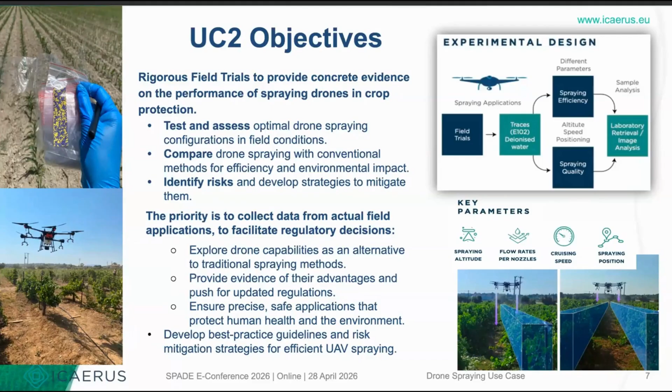So next slide, please, Katerina. Yes, thank you very much.

So very briefly, what's the theory behind drones and why is this new technology so popular with people, even when we are lacking the theoretical basis and evidence on their safe use? So first of all, it's a robotic platform. We can predetermine everything. We can create a flight path, and then the drone operates itself. This has numerous advantages on itself.

First of all, the platform is far away from the user, so the user has minimum contact with the often hazardous agrochemicals. And the other one is that they can very easily access hard to traverse terrains like slopes, for example, which in conventional terrestrial machinery is probably the highest risk for operator health and generally the major source of injuries in agriculture, when the terrestrial machineries just flip when they enter very steep terrain.

Now, they are a flying platform. They eliminate soil compaction and they operate on LiPo batteries. So once a sustainable, renewable framework is established on a local level, they can eliminate fossil fuel dependency. Now, at the same time, we're talking about a machine that usually weighs roughly 20 to 50 kilograms, depending on the model. This machine can roughly carry most of its payload, like 80%, in water.

So this is a very small tank compared to very large terrestrial sprayers that can often carry 1 or 2 tons of water. So by default, UAV spraying is conducted as an ultra-low volume application, meaning that the final product is diluted in a much smaller volume of water. So we end up with very highly targeted applications that can be enabled because drones have very accurate positioning systems. And as a result, they also save a lot of water in crop protection applications.

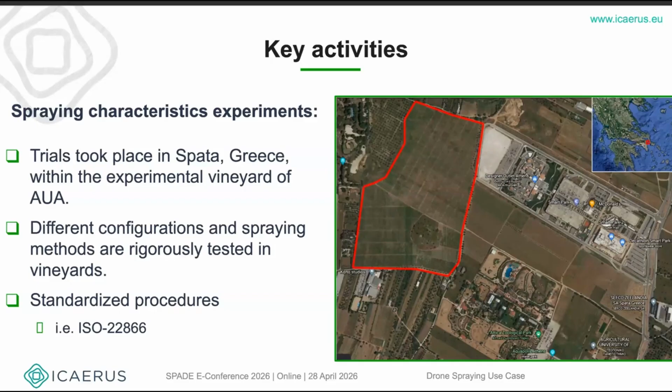So if we go to the next slide, we will see the first of these protocols, protocol ISO 22522, which states what is the optimal sampling methodology for such experiments, and what are the parameters that we have decided on the experimental design, which in our case are altitude, flow rate, which under a constant application rate per area is translated as speed of application, and then the spraying position, whether it's on top of the row or between. So every yellow dot that you see here, if we move on to the following slide, you can see that it is actually a water-sensitive paper, which is positioned at different altitudes, and the different altitudes give us a better understanding of how well canopy coverage is achieved.

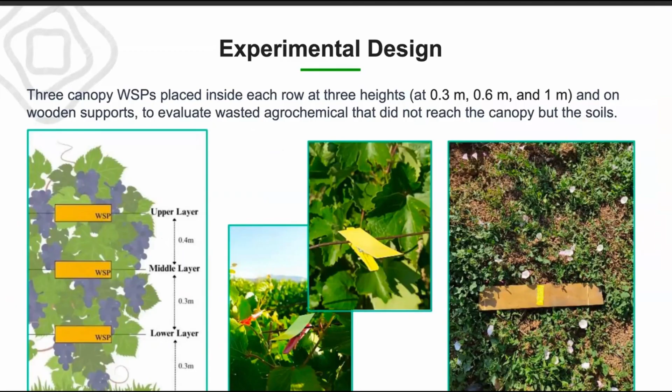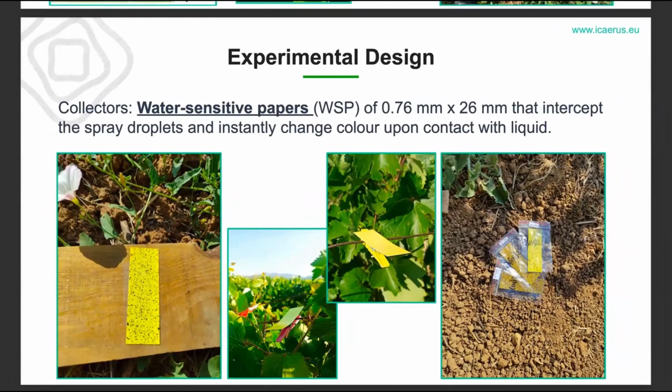If we move to the next one, please, you will also see an example of different samplers. Here you have it. And we also measure the deposition on the ground, which is, of course, something that we do not want when the target is the canopy. So on the following one, this is what happens within the field. For what happens outside the field, we have a different standard, ISO 22866, which states how collectors should be positioned. And if you go to the next slide, we have some images as well.

Now, actually, we have the requirements, which I'm not going to go through now because of time limitations. But the idea is that here we do not spray with water. We spray with a color tracer, tartrazine, namely E102. And then everything is collected to the lab, and based on the concentration at different distances, we get estimations of

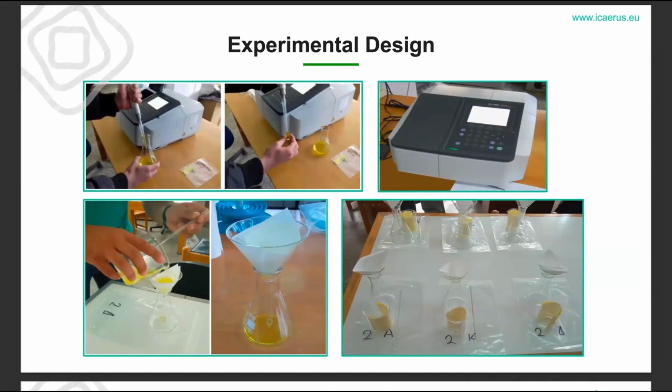how droplets move. So if you go through the next two slides, I think, yes, the next one is the equations. And the final one should be the result. So this is overall what the use case tries to create. We have completed already two peer-reviewed publications on what happens within the field, coverage graphs like that. And then we have another publication on drift curves, which is on the right.

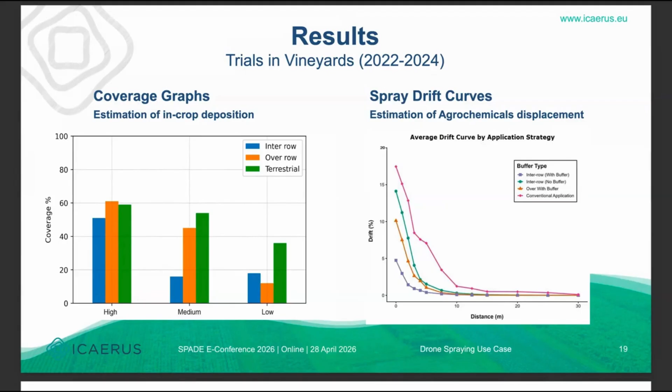So I would like to ask now if we have enough time to go through for like 3 minutes probably to see the efficacy trials that we have conducted within the project, or are we out of time already? Yeah, we are behind the schedule, Vasilis. So if you can. Okay. Yes. So maybe just a very brief 1 minute to go through the trials, because it would be nice to show them. So Katerina, if you can please go through the next slide, even after that, until we have the efficacy trials. Here, perfect.

So the other half of the experiment is that aside from modeling, we have decided on some, let's say, crops of interest. So in collaboration with the company members of HCVA, we have obtained experimental permits, because it's otherwise illegal to conduct spraying, even for research purposes, using actual plant protection products. And some of these cases are the maize herbicide that we did in Aliartos, an experimental farm of the university, then rice in Chalastra in the northern regions of Greece, and then again wheat in the central regions.

And aside from that, it's in the following slides, but I'm afraid I will not reach there. We have also done a very interesting case on maize insecticide, because normally when maize insecticide is performed, no terrestrial machineries, at least in the Balkans, are actually designed to go through the cornfields at that stage. So we do not talk about a comparable result, but rather a new opportunity that is generated by the drones. And then the final application that we did was a defoliant application on cotton, which again presented very nice results.

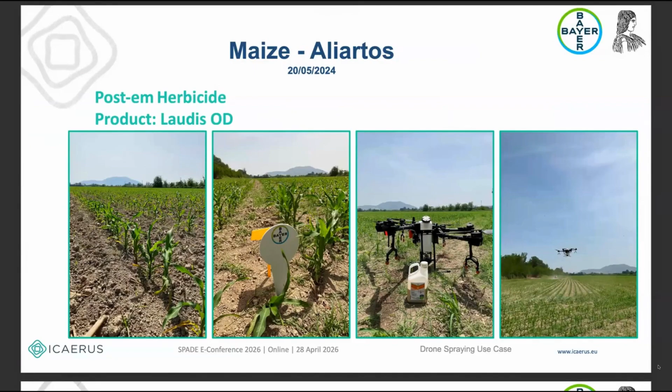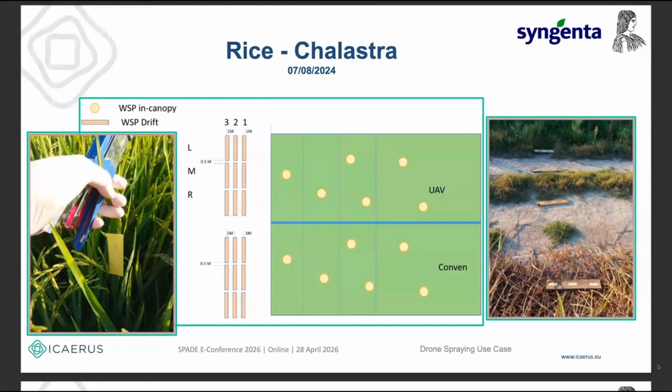If we go through just the final slide, because that's the take-home point I want to give you. So this is a very brief overview of the experiments. Yes, you can continue, Katerina, please. Show some images and conclude. Yes. Here are some images from the herbicide application, and one final slide on the rice, please. Here, that's the final slide. No, the one with the platform. Yes. Because that's a very interesting thing.

Consider that in rice especially, it's a very popular technology to adopt because, as you can see here, in rice we have paddy fields. So paddy fields cannot be traversed with rubber wheels. They use these gear-like steel wheels on tractors that cannot enter the road. So instead of going through this whole process of carrying the tractor there and then dropping the tractor to operate, the rice growers are presented with the alternative of just having a drone to do everything that can be carried by a single car. So yeah, that's the thing.

Overall, very comparable results for most of them. In herbicide and desiccant applications, drones have outperformed the conventional machineries. Unfortunately, we did not go through the results. I took too much time in the beginning. For any question on specific results, I assume this publication will be open to everyone, but if any questions arise about the results, we would be happy to reply via email or any other form of communication. So thank you very much, and apologies for taking a bit of time.

Okay, so Osborne, should we start with the first topic? It's about the DG Agri policy perspective on CAP, Green Deal, sustainability and digitalization, and how drone and data innovation can be integrated into policy tools and incentives. Yeah, but do you want me to say something about that? Well, you're moderating this session, right? For the policy. Mm-hmm. Okay.